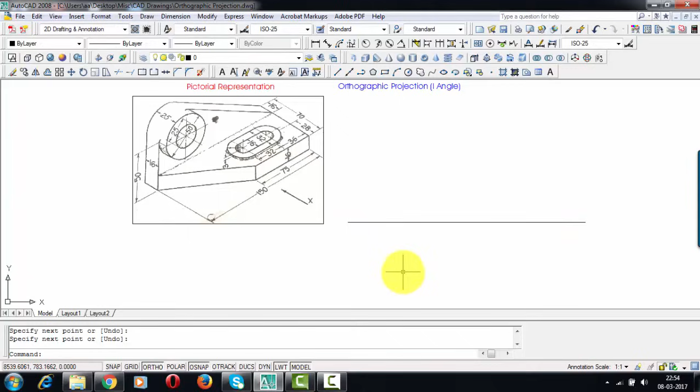Now in order to make the front view, you have to make an assumption initially. What is that assumption? You need to assume that the entire object is at a certain height above the horizontal plane. Let us say that the height taken is 10 millimeters. At the same time, you need to make sure that your object is at a certain distance in front of the vertical plane. So let us take that distance as 10 millimeters yet again.

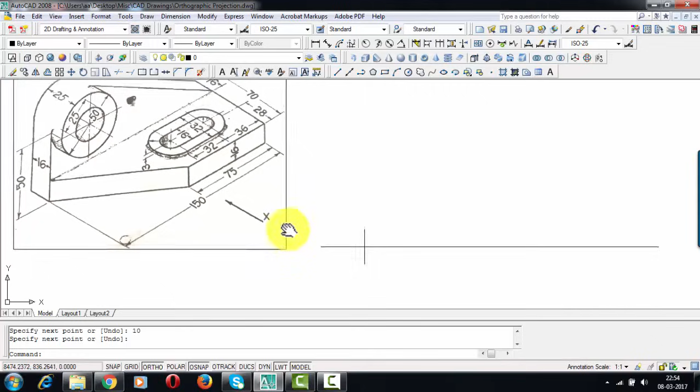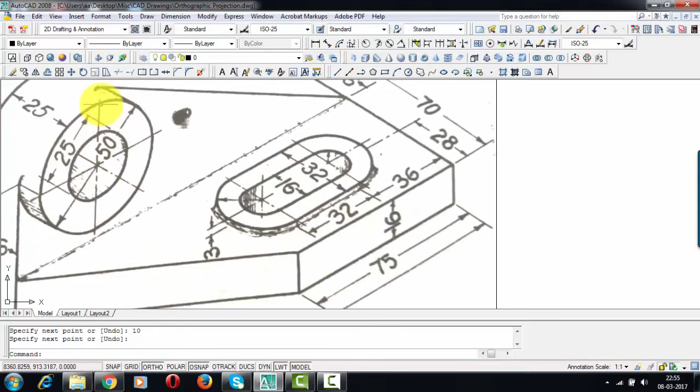All right. Now when you look at this object from the front, from this X over here, you can see that the maximum width that this object is having is 150 millimeters. So what according to you is the maximum height? You can clearly see that this height over here is 50. Then this distance you see is going to work out as 25. So 50 plus 25 shall work out as 75. So the maximum height in this case is 75 millimeters.

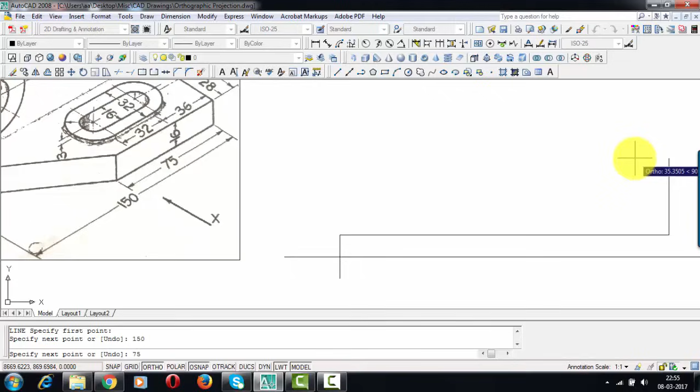Anyway, we'll now go ahead and make a box of 150 by 75. 150, 75, 150 and back to where we started.

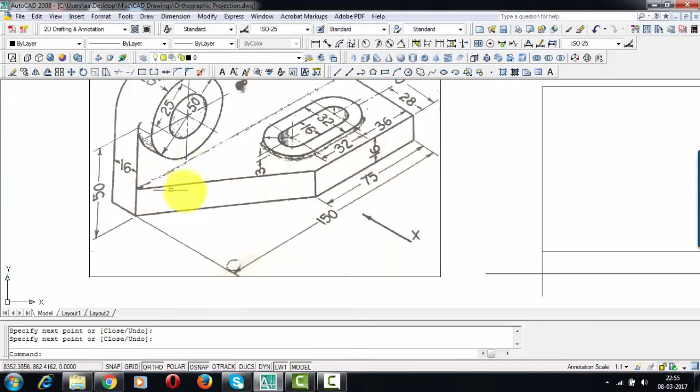Alright, so we're gonna start off from the base, and you can clearly see that this object is having some kind of a foundation of height 16 millimeters. So we're gonna go 16 steps in the upward direction, and then we'll travel by an amount of 75 millimeters, but from this point onwards. So let's go ahead and do that. 16 millimeters from here, and then 75 millimeters, and then we're gonna have this line, this sort of an edge that you see.

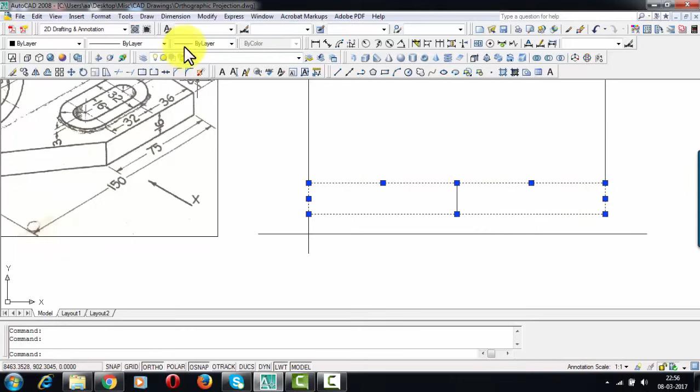So let's fit in that, and this inclined portion with the vertical plane that you see is going to be observed as a straight line. Let's make that from here to here. There you go. Okay, let me darken the portion that is absolutely visible by dark solid lines. Let me use a different color for this purpose, red. Let us do this dark also. Done. So what's next?

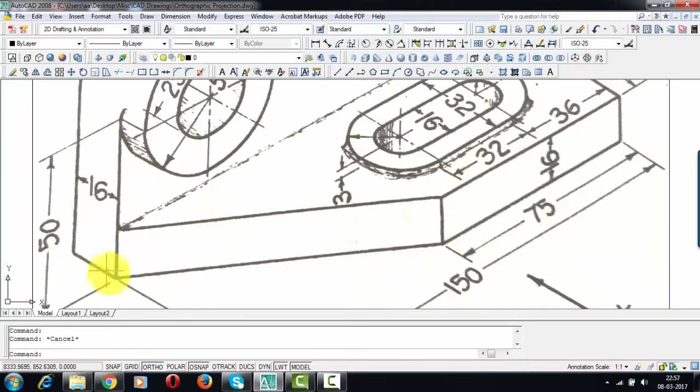Let's move ahead and fix the location of this circle. Now this circle appears at a height of 50 millimeters from the bottom. Please watch this carefully. 50 millimeters from the bottom, and then towards the right we need to travel by an amount of 25 millimeters. You can clearly see that this outer circle is having a diameter of 50, hence the radius is going to be 25. So this horizontal distance that we need to travel is 25. So 50 above and then 25 towards the right, so that you can have a center, and then you can make these concentric circles.

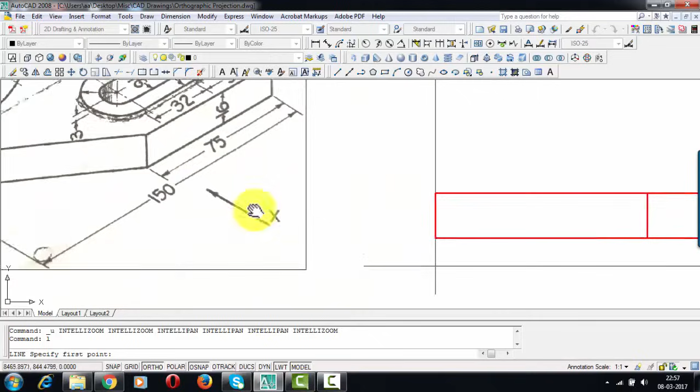All right, so 50 above from the base, let me do that, and then 25 towards the right, and that's the center point. Now with this as the center, we have two concentric circles. One is going to be having a diameter of 25, so its radius is going to be 12.5, while the other one is having a diameter of 50, and hence its radius is going to be 25.

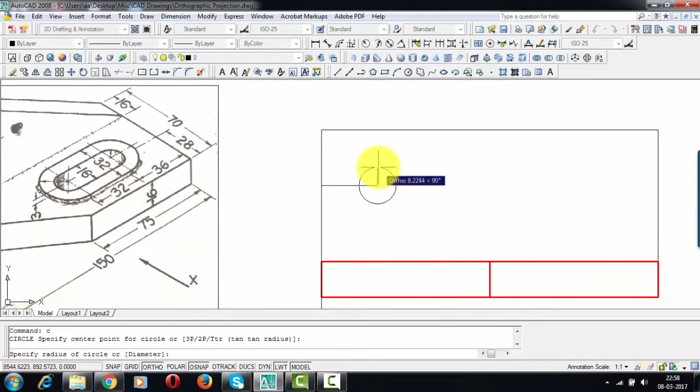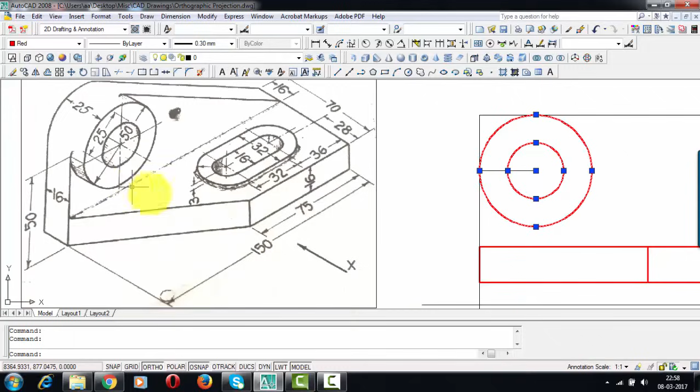So let's have these two circles. 12.5, there you go, and then one more circle outside, the bigger one, same center, the radius is different, it's 25. That's it. Now let me make sure that these two circles are shown by dark solid lines. This is something that is absolutely visible when you look at this from the front. All right, now let's go ahead and darken this line.

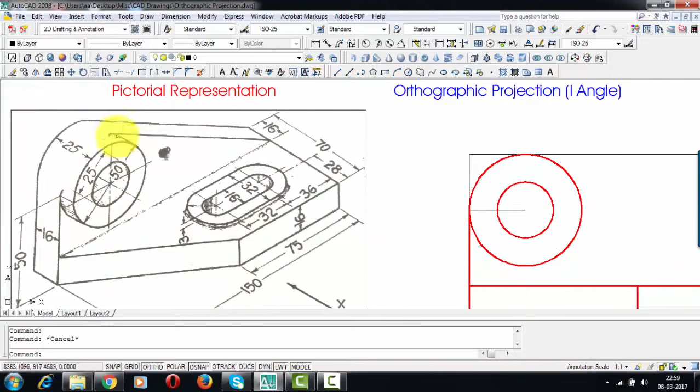Let me use a dark color, red. Perfect. So guys, we need to think now what else can be done. Now this line appears as if it is a tangent towards this circle. So what we're going to be doing is drawing a line from this point, and we're going to make sure that it appears in fact as a tangent.

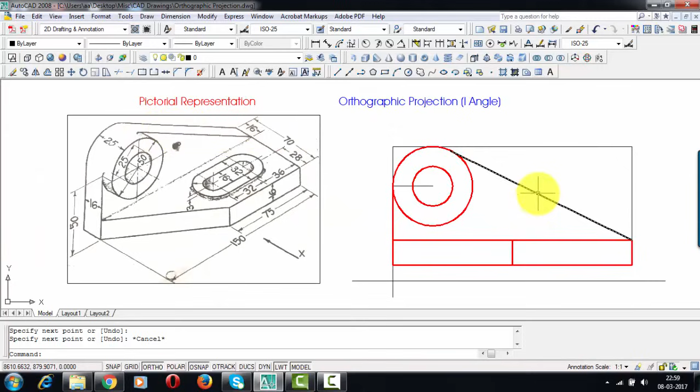So let's start from here, and there you go, that's a tangent. Let's join it. There you go. This is exactly how this 16 mm wide strip would appear from the front. Okay, and let's use a different color for this.

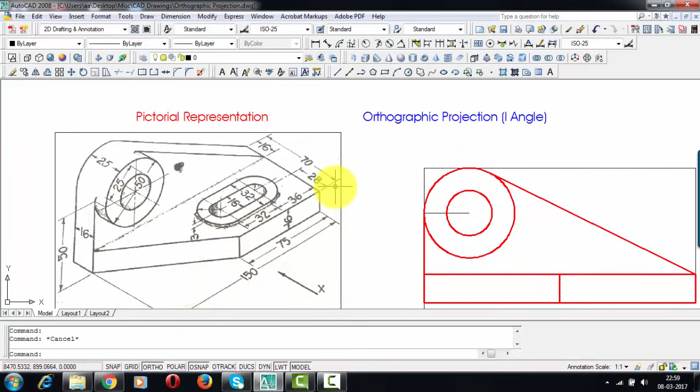So guys, the front view is almost over. The only thing left in the front view is this hollow portion, but this is something that I'll take up after creating the top view. Alright, now we're going to make the top view, and for drawing the top view, the maximum width is 150 and this is 70. So we're going to make a box of 150 by 70 mm. Let's go ahead and do that.

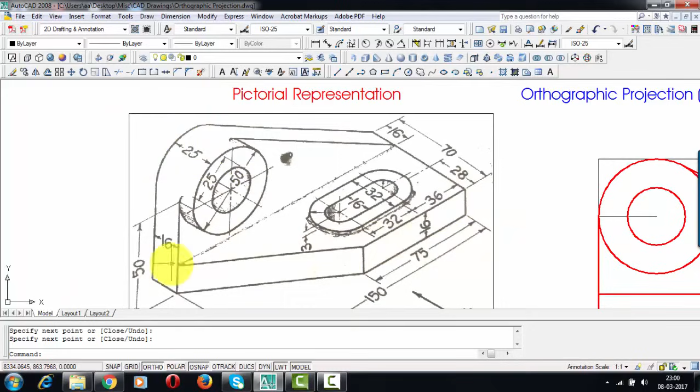150 by 70, this is going to be 150, this is going to be 70, 150, and back to where we started. So when you look at this object from the top, please see where the mouse is hovering. This portion is visible, this portion is visible, this is visible, this is also visible. I'm going to initially create this profile. Let's go ahead and do that. Let us darken this.

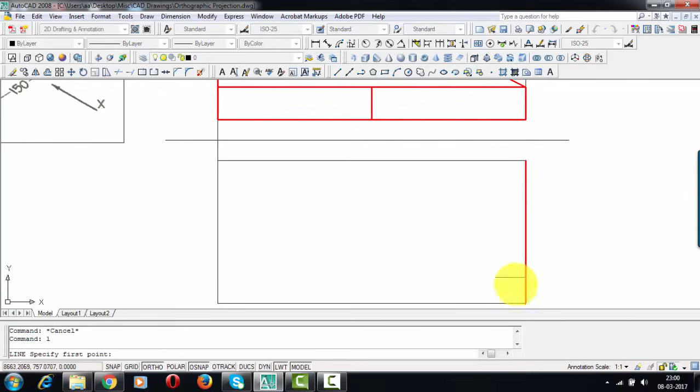Now we need to travel by an amount of 75 millimeters, and then we're going to join this over here at a distance of 16 millimeters. We're going to have a point over here. So let's travel by 75. That's it. And from this point onwards, in this direction, 16 millimeters. So 16. There you go. And we're going to join this point with something over here that we place at 75.

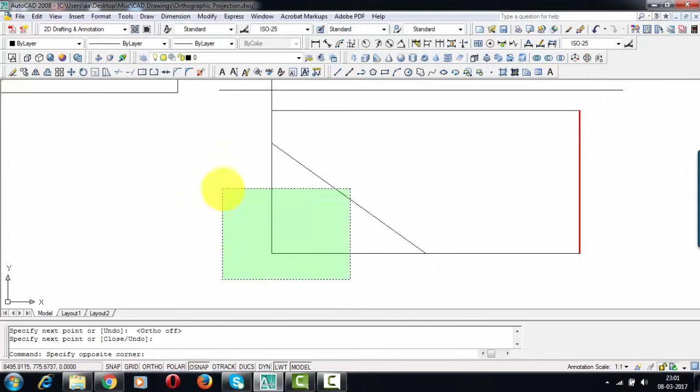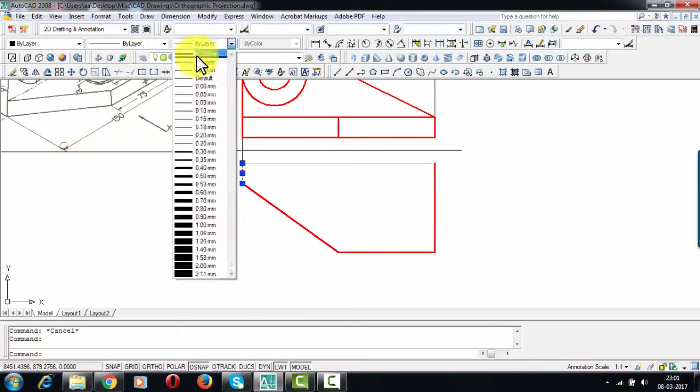Now I'm going to chip off this portion about this line. Let us do that quickly. That is not going to be a part of the top view. This profile you see, now we're going to have to represent this with the help of dark solid lines. Pretty good. Let's do this. Now let us go ahead and do something else.

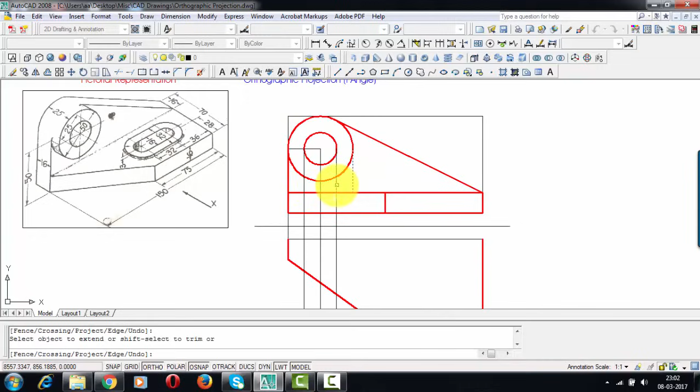You see this profile, guys, the circle starts here, ends here in the top view. So what I'm going to be doing is extending these so-called projector lines down below, something like this. Done. Pretty good. And I can extend the line from here also.

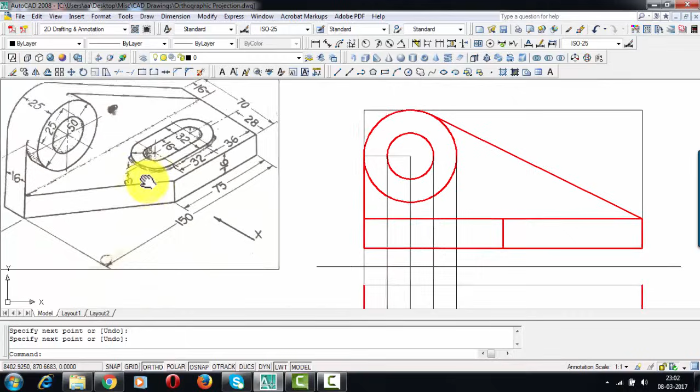Okay, so we're going to have this circular tube extruding from here, and this tube has a length of 25 millimeters. Please watch this carefully. From here onwards, I'm going to draw a line 25 millimeters, and then let me close it down. Let me check whether it is really 25 or not. Yeah, that's 25. Pretty good.

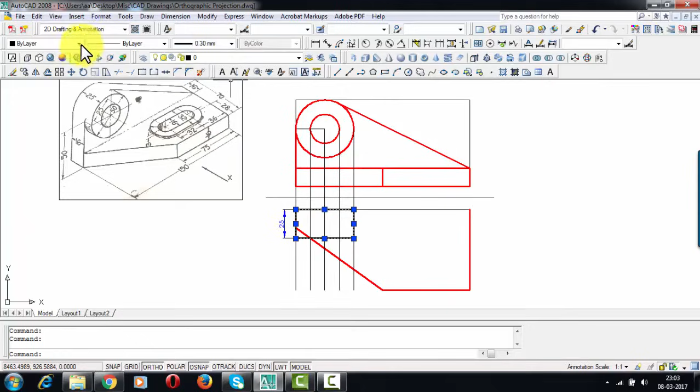And then from here on, we're going to turn towards this direction until we reach here. That's it. And let's just close that down. Now this is something that you're going to see from the top. Now let me show you this. Let me initially darken this, and then we're going to work out which portions are going to be visible and which are not.

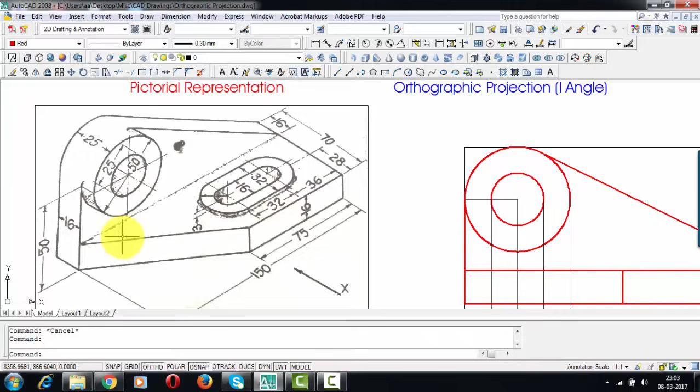Now what I'm going to be doing: this very small portion of that part is not going to be visible when you look at this object from the top. So you're going to have to use a different line to represent that part, and since this portion immediately falls below this part, we're going to have to use a hidden line for doing that. Let's go ahead and do that. This with this, that's it.

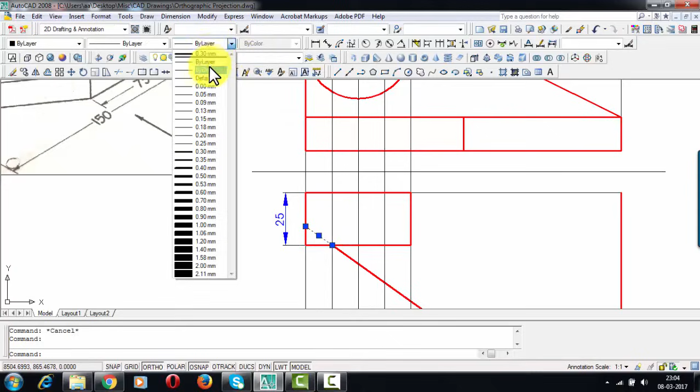And let me, yeah, pretty good. And I'm going to be using red color and a hidden line to represent this portion. All right, that's pretty good. Now guys, please watch carefully. This portion is actually hollow from here to here.

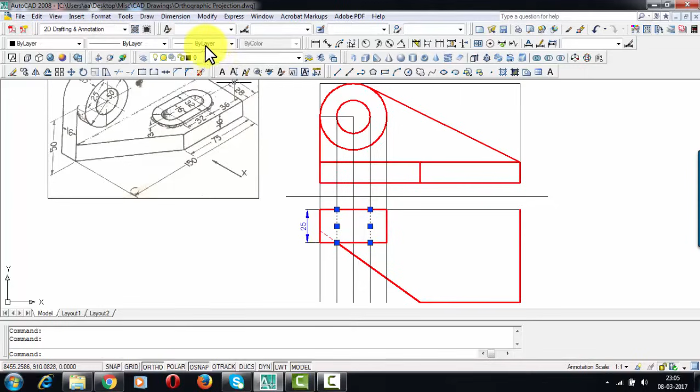Okay, so in the top it would appear as if there are going to be hidden lines from this point. Let me show you exactly where. From here to here and from here to here. So these are going to be represented by hidden lines. Let me show you how that can be done. Hidden lines. Okay, using a different color, let's say red.

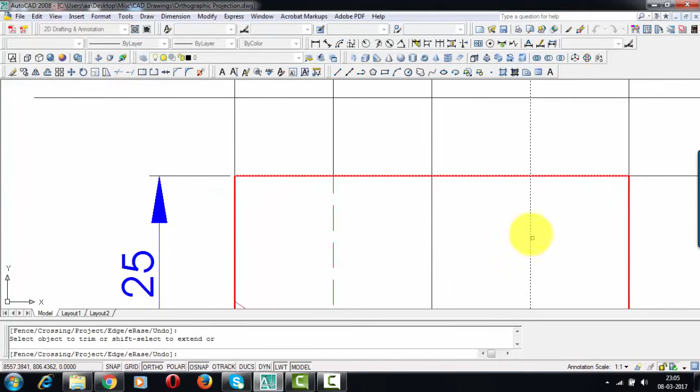And what I'm going to be doing is, let me chip off this portion to show you exactly the location of those so-called hidden lines. In fact, let us do that. There you go. So these are the hidden lines that I was talking about.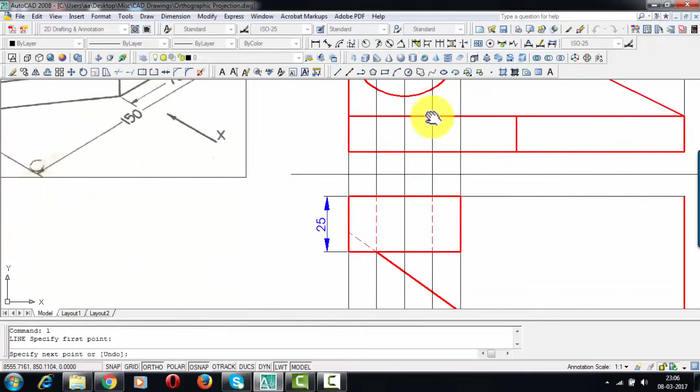Now guys, there is this strip starting somewhere here, that is exactly at the point where this line is a tangent to this circle. Okay, so this line is a tangent to this circle at this point, and we need to draw a line from here. That's the point, and from this point onwards we're going to be coming downstairs, and let's say from here. Okay, we have this strip starting, and this strip is going to be 16 millimeters wide.

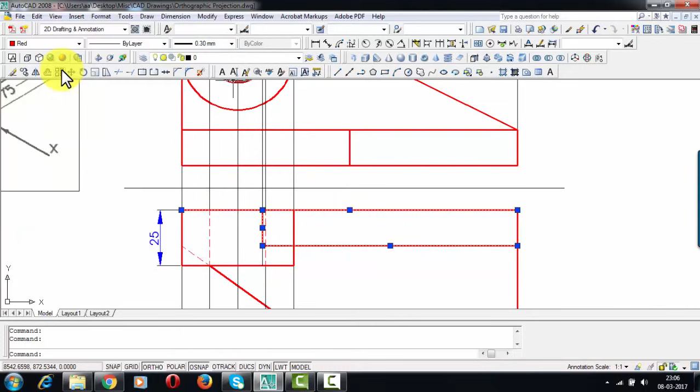You can see that clearly now. 16 millimeters, so 16 millimeters, and that's the strip. Okay, so the only thing that we need to do right now is to darken this portion. Let's go ahead and do that. 0.3 red color. Yeah, pretty good. Now when you make this, this portion is not going to be visible, so we need to chip off this portion. All right, let's do that quickly.

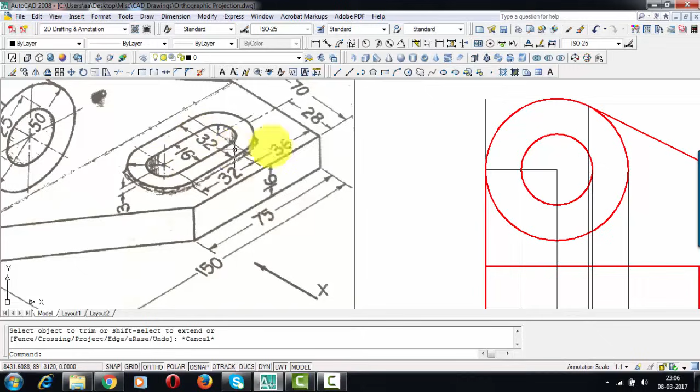There you go, and that is something that you're going to see, this sort of a tube portion that you're going to see from the top. All right, now we're going to go ahead and make this hollow portion, and for doing so, from this point onwards, this point corresponds to this point over here. I'm going to travel 28 millimeters, and then I'm going to move towards the left hand side by 36 millimeters. And when I do so, I'll reach here, that is the center for these two semicircles.

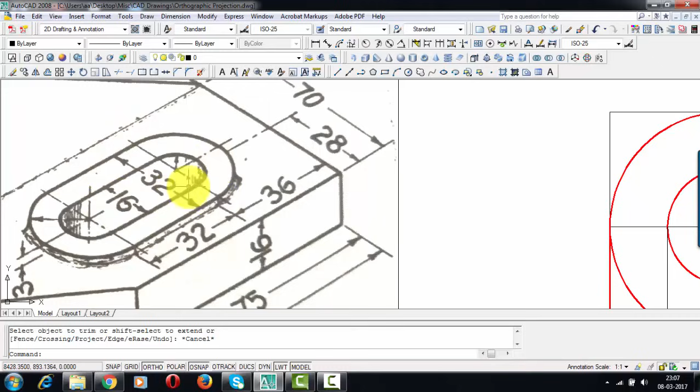Now guys, please listen and watch carefully. The smaller semicircle appears to have a diameter of 16, and hence its radius is going to be 8, whereas this larger semicircle is having a diameter of 32, and hence its radius is going to be 16. So let's do this step by step. 28 millimeters here, and then 36 here. Okay, 28, then 36, and this point automatically becomes the center point of two semicircles.

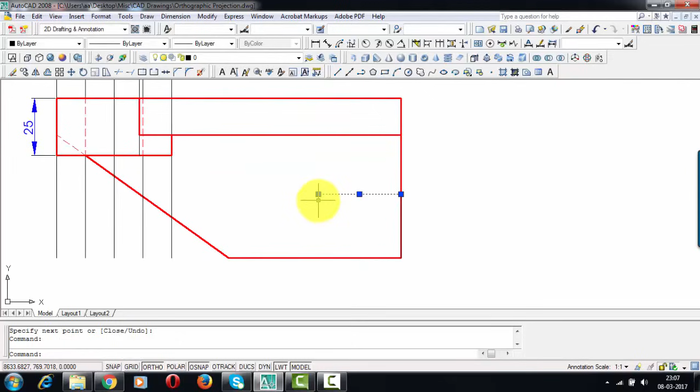So initially I'm going to be drawing circles, and then I'm going to chip off half of the circle to make it appear as a semicircle. So these semicircles have radii: the smaller one has a radius of 8, the larger one has a radius of 16. So let's go ahead and do that. 8 and 16, yeah. 8, and the other one 16. There you go. So now what I'm going to do is I'm going to chip off this half portion.

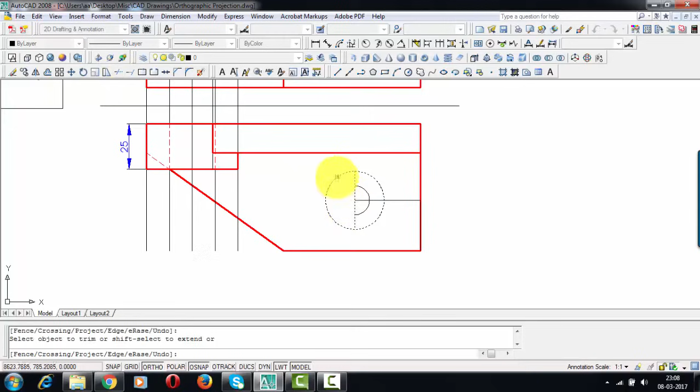All right, and how can that be done? Let us see. Yeah, pretty good. Let us draw a line about which I'm going to be chipping off that portion. All right, yeah, pretty much. There you go. Now let us move ahead, and we're going to travel from this center to this center. The distance is how much? 32. So let us plot that distance from here onwards. 32.

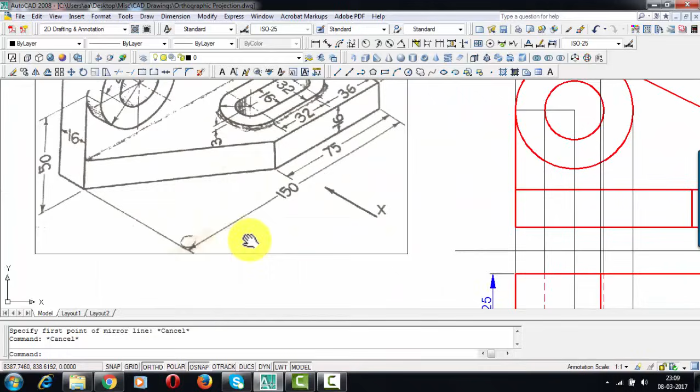Pretty good. So this is the new center, and with this as the center, you need to draw these two semicircles now over to this side. Again, both of them are going to have the same radii. This one is going to have a radius of 8, and this outer one is going to have a radius of 16, obviously. Now I'm going to be using the mirror command for doing so. Let us do that.

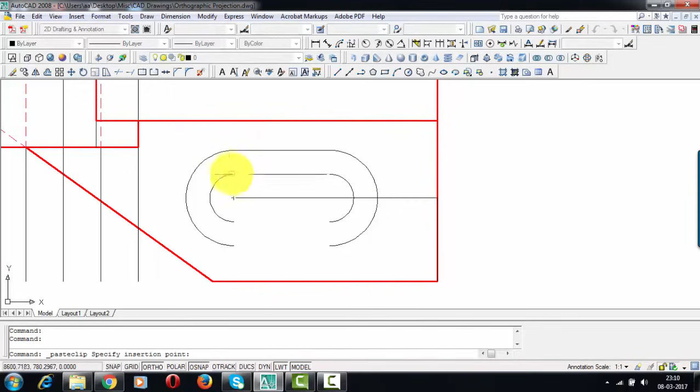Yeah, pretty much. Now let's join this with the help of a line, something like this. Let us copy this. Yeah, we're almost done with the top view now. You don't need this line now. Okay, so I'm removing this, and what now? You need to darken this portion. Pretty good.

Alright guys, now that we have successfully created front and top views, we'll now go ahead and make the left hand side view, and for that I'm going to be drawing a line over here. Towards the right of this line we have the profile plane, onto which the side view, or to be very specific, the left hand side view is going to be made. And for that, follow the steps. Initially you need to draw a line from this intersection point.

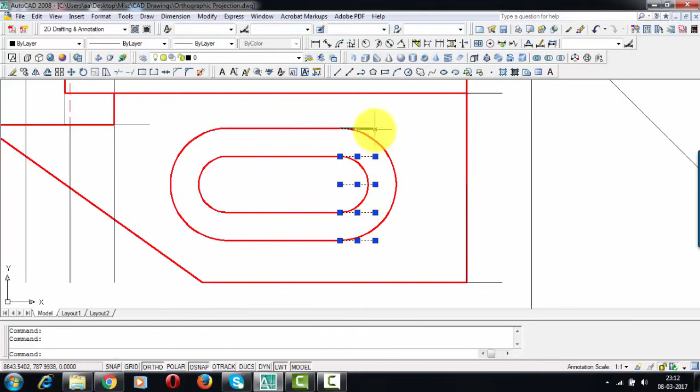Now I'm going to be extending horizontal lines from each and every point in this top view. Let's see how it works. So let me select all these lines, and I'm going to be using the extend command, and I'm going to be extending all of these lines until they reach this inclined line at an angle of 45 degrees. Yeah, pretty good. Now we're talking. Pretty close. These lines are extremely close to one another.

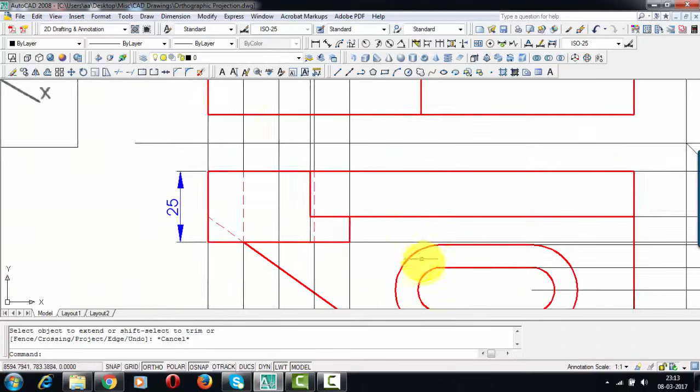Okay, that's it, guys. But guys, it seems as if you forgot something when you speak of the front view. This hollow portion I'm talking about. It starts here and ends here. So its top view starts from here and the top view ends here. And its corresponding front view is going to look something like this. Please watch carefully.

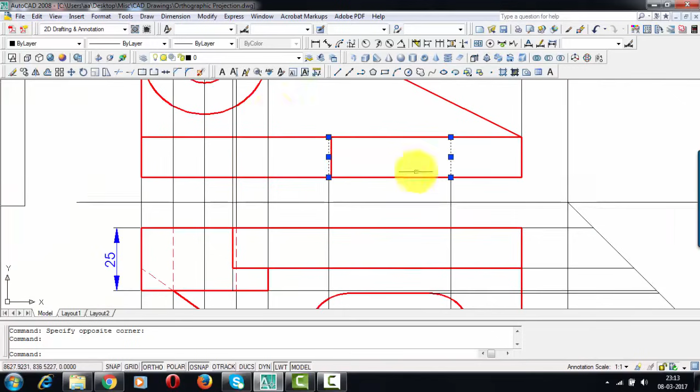As promised earlier, I told you that this front view of this hollow portion is going to be made after creating its top view, and that's exactly what I'm doing right now. So I'm going to be using this hidden line for this purpose. Where is it? Hidden 2. Yeah, there you go. And using a red color for this. That's it. Okay, now let's go ahead and do something else.

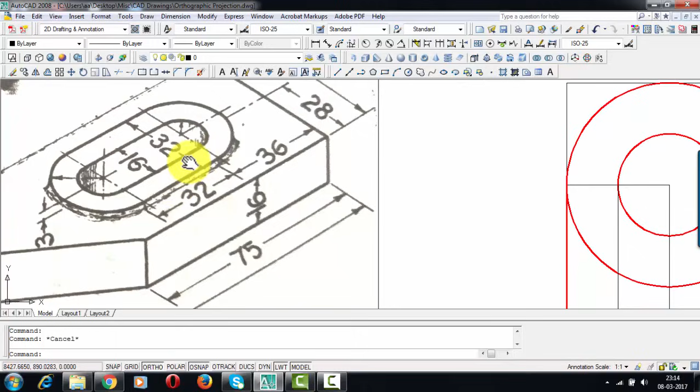This portion looks like an athlete track, a racing track in fact. Now this portion appears at a height of 3 millimeters. All right, so I'm going to give it some height, and I'm going to be using this fillet command. All right, so let us do so.

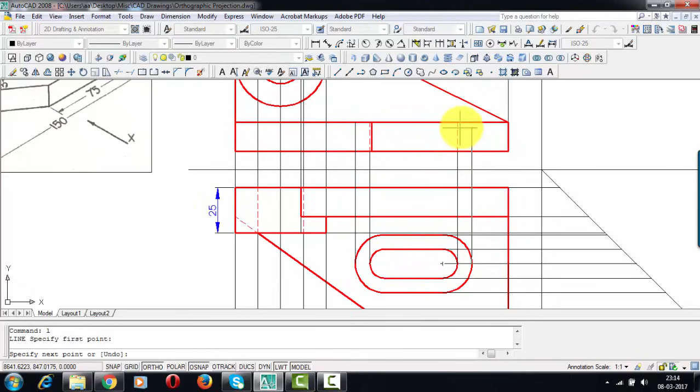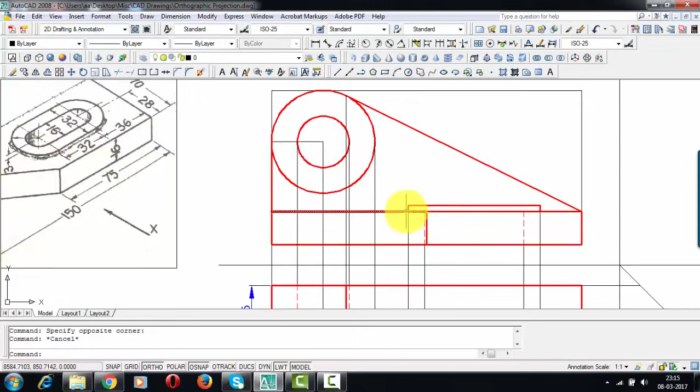From here till we reach here, from here till we reach here, and this height has to be given as how much? Let us see once again. This is 3 millimeters. 3, and we need to travel it from here also 3 millimeters, and then let's join them. All right, now let me use a different color for this. Yeah, there you go. And we're going to be using this fillet command so that we can have a smooth curve, something like this. All right, let's do so.

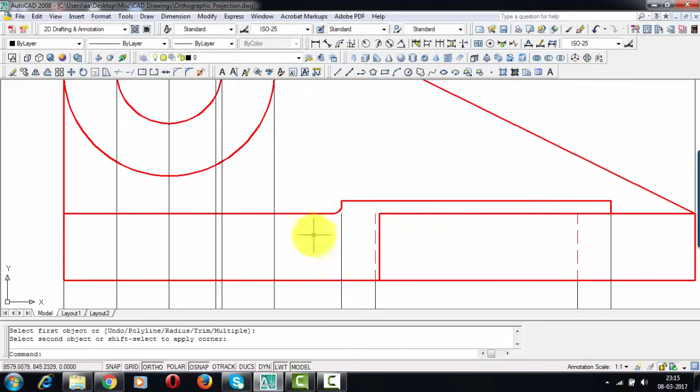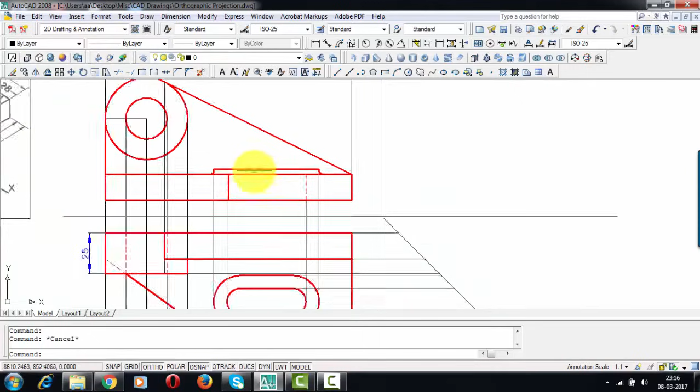Fillet. I'm going to be using this radius. So this height is how much? This is 3. I'm going to be using this radius as 2, and I'm going to be selecting this part and this part. That's the fillet I was talking about. All right, now we're going to go ahead and make a fillet over here also. By default it is 2 millimeter radii. Now let us join this portion again, and let us darken this. Yeah, there you go. This sort of profile that you see. Okay, now let us proceed.

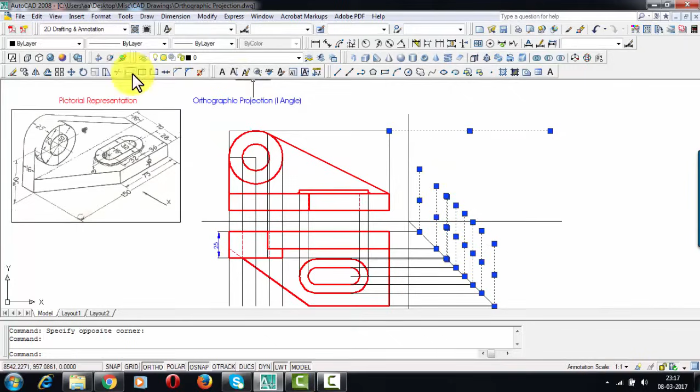Let's have this upper limit. That's the limit. Now let us extend lines from here. We're going to extend all these lines until they meet this horizontal line here, and it should look something like this. Yeah, there you go. Now, so what's next, guys?

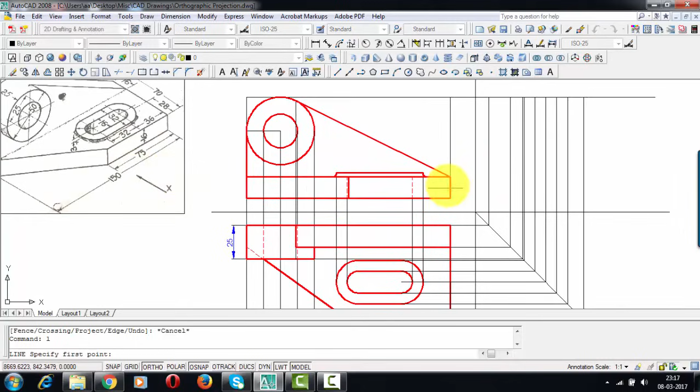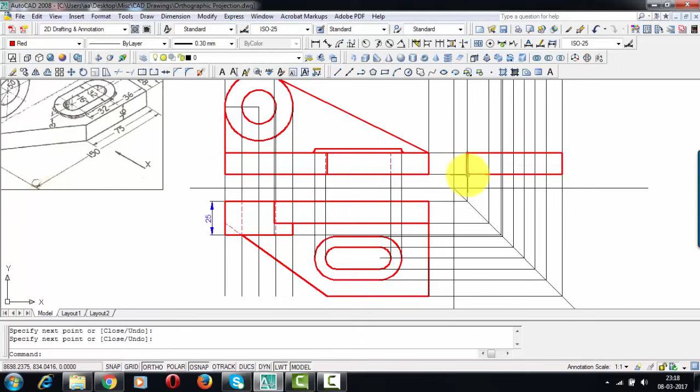Initially I'm going to be making this portion, this base over here, 16 mm base, foundation, whatever you say. So let's have those lines from over here and here. 16 millimeters. Let me use a dark color for this immediately. So it starts from here and ends here. This is the entire width, starting here and ending here. So let us go ahead and do that, something like this. Pretty good. Done. I'm going to chip off all those portions which are not going to be evident, but right now I'm going to be using a dark pencil for this purpose.

All right, so we have this 16 millimeter width. So this is 16 millimeters, this is 16 millimeters, and from here you need to go upstairs until you reach here. Let me show you exactly the position. For that I'm going to be using this sort of construction. Okay, so we have to travel by this amount, and the limit is over here. That's it, that's the limit.

Let's have this, and let's have this also. There you go. Let me do this until we reach here. That's it. Now what? So we have this line also, this line I'm talking about. That's the line. But what now? Do you see a line over here? No, we don't. So you don't need to draw this line, you need to chip off this portion. There you go. What's next?

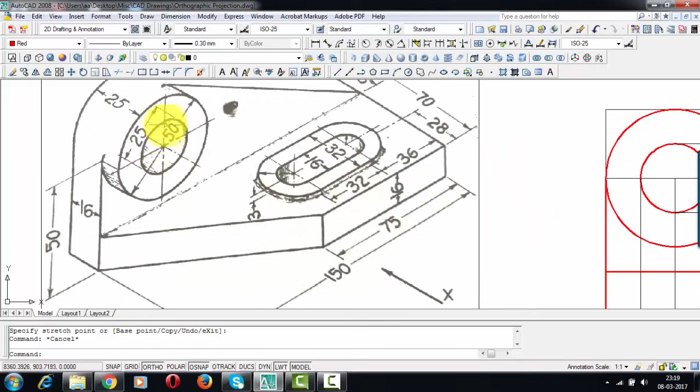Okay, so when you try to visualize this object from the left hand side, you'll see 2 hidden lines. From the center, one hidden line is going to be 12.5 millimeters above, whereas the other hidden line is going to be 12.5 millimeters below. The entire width is how much? Let me see, it's 25. So up till we reach this line I'm talking about. Please watch this carefully, from here to here. All right.

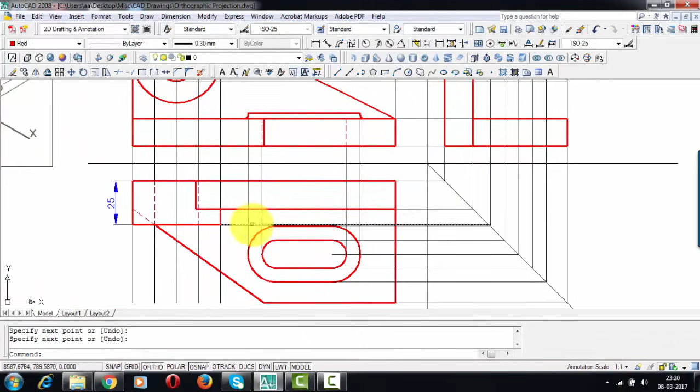So we have a hidden line here. That's it. Let me check whether I've done it correctly or not. Here, here. Yeah, pretty good. And we also have one more hidden line. That's the hidden line, and we're gonna use a thin sort of line for this purpose, and we're gonna be using a hidden two line for this.

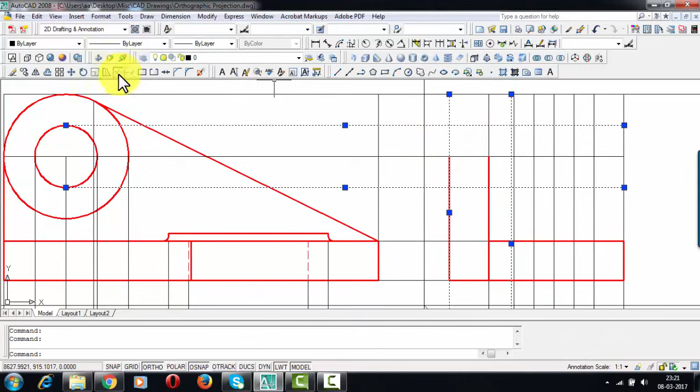Okay, now I'm gonna chip off the portion. How can we do that? Let me see. Okay, I'm gonna chip off that portion. That's it. And that's how these so-called hidden lines are. All right. So you have this portion, and then you have to come down below, and it should look something like this. Please watch carefully, and let me use a different color for this.

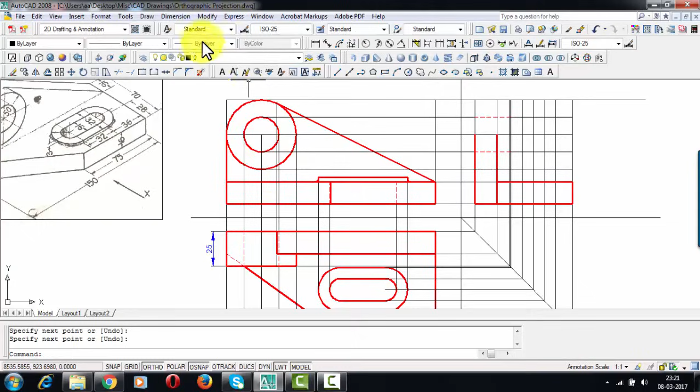So we have to reach here, this bottom point. That's it. And let us do this here, here, here, and here, and here. That's it. That's how the object looks from the left hand side. Okay, and some portions are still remaining. How can we do so? Let's go ahead and do that.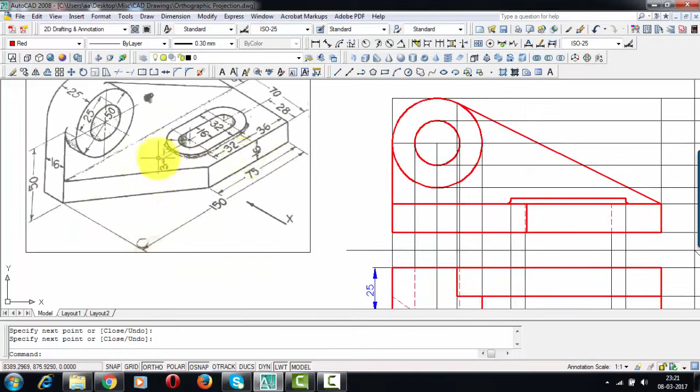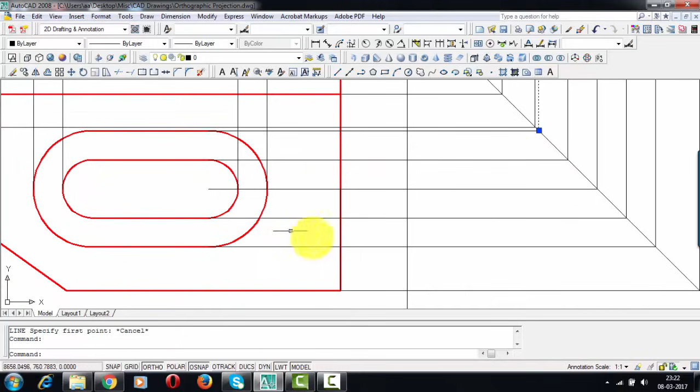Now this sort of profile that you see, let me again change the color. Layer, black. Okay, so we're gonna start off with this portion from here, this line, and we're gonna end up over here. All right, 3 millimeters above, and then over here, and then this ends.

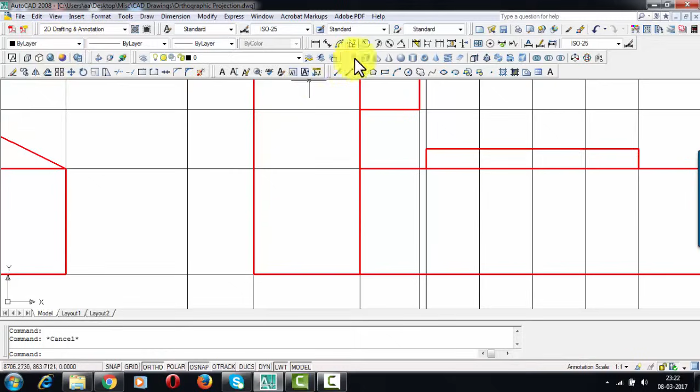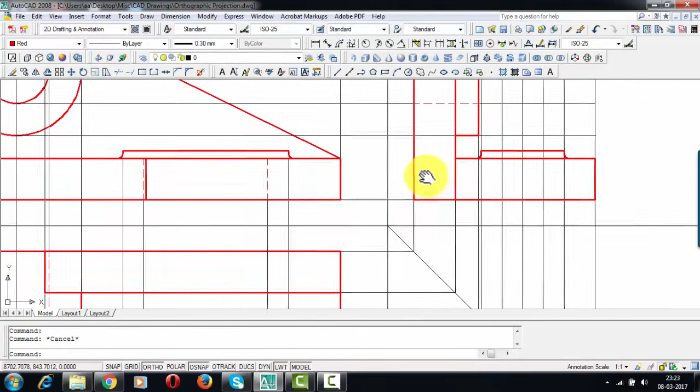All right, so let me use a dark one for this, red, and then let us use the fillet command. All right, again use the fillet command. Yeah, there you go. That's it. And hidden lines, where are those so-called hidden lines? Hidden lines are gonna start from here till here.

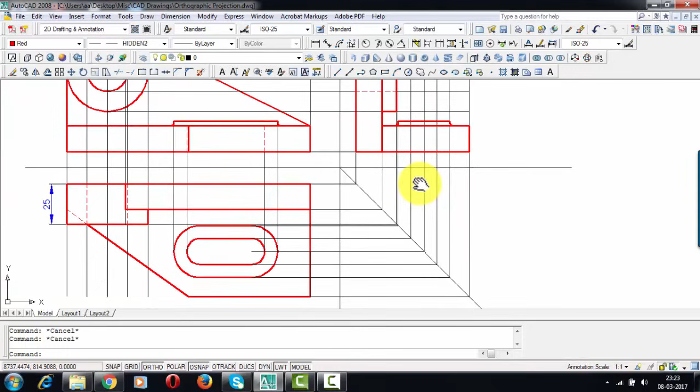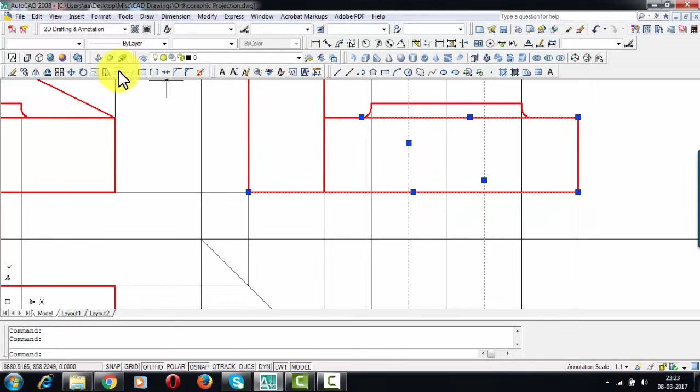Let me do this. All right, so let me make the hidden lines. Layer, where is it? Hidden two. Yeah, there it goes. Start from here and end here. That's it. Yeah, it's a pretty good job, man.

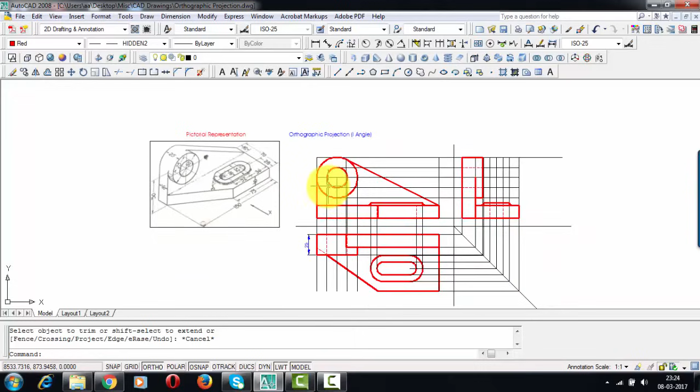So guys, that was all about how to create the front view, top view, and the left hand side view for this particular object. And if you want to see how the dimensioning is being done, let me show you. I've already made this problem this way, so it's better if you can take a picture of this. It would be much better. Yeah, that's better.